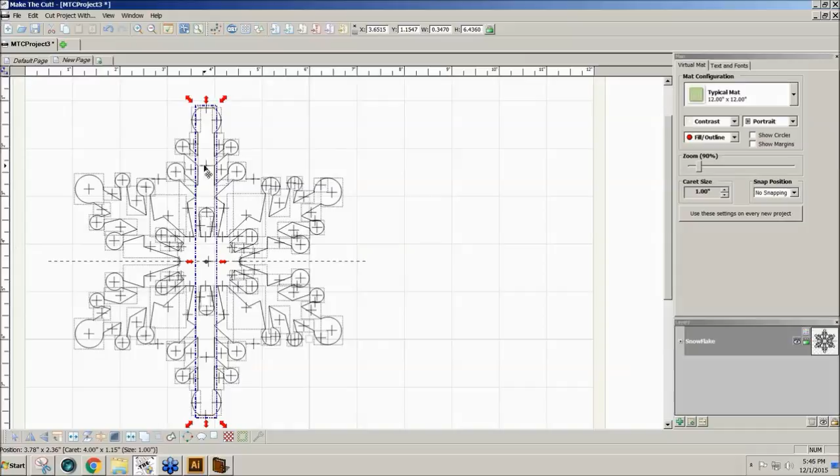But if I go through and find all the horizontal lines first, I'll just click on all of them and send them to their own layer and hide that layer. I'll look and see if I can see any other horizontal lines, because those would all be score lines. Here's another one and another one. I'm holding the Shift again, sending them to their own layer. I see a couple more. Sometimes they're hard to see with the plus signs, but I'm just going to send that up and hide it, because all I want left is the cutting pieces.

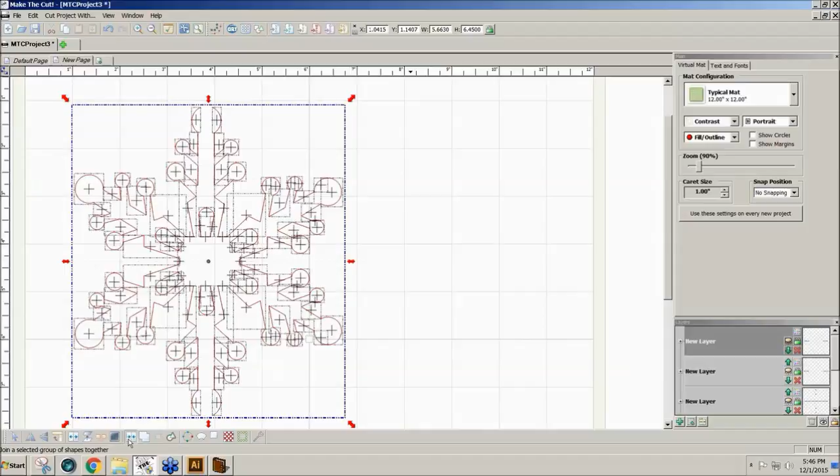So if I select them all and join them, I can see them a little bit better. So yeah, that looks pretty good. But as we saw before, they were all broken apart. So to join them back together, after I've joined them here, I can go to Fuse and Weld and apply, so that now all of these pieces are one single shape. And that's really what I need. They don't fill in all the way because there is an open path here at the top and an open path here in the bottom, but we know that all these lines are now joined, which is a good thing.

Now I'm going to send this to its own layer by clicking on the two green plus icons in the lower right corner, then right click and move it to the bottom. So now I'm going to hide that, and I'm going to open all of these score lines that were in the design. Now this is a small design, so it's pretty simple. When you have pop-up cards, every other level is going to be opposite. So this would be a valley fold. This is a mountain, so these are valleys.

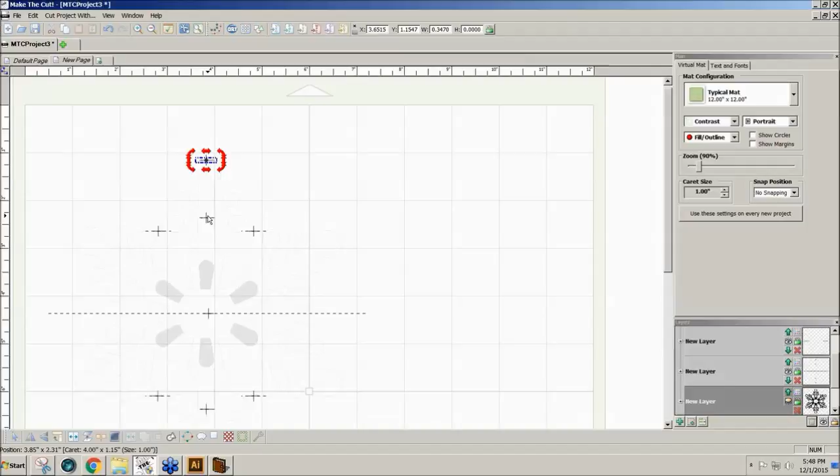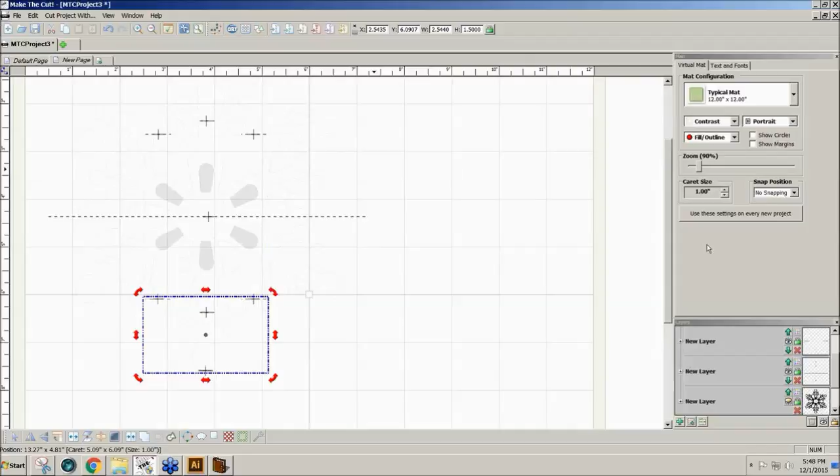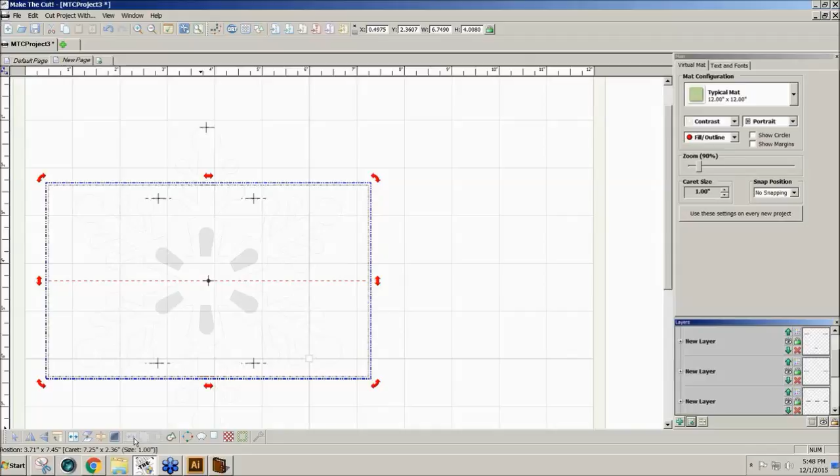I'm holding the Shift key and clicking on all the valley folds. This one's a mountain, so these two have to be valley. This is a mountain, and this has to be a valley. So it didn't keep them all. I'll send those up. I'm going to hold Shift and select. I'll just do the mountain ones, there's fewer. I'm going to hold Shift, left click on the mountain, and this mountain, and this mountain, and send those to their own layer. I'm going to join them so that they'll stay together, and then I'll hide that layer.

The rest of these will be valley folds, so I'll just select them all, join them, send them to their own layer, click the trash can to get rid of any empty layers, and then I'll open the snowflake layer, and now we have the three different pieces for our file. I'll left click on the name and type in cut, because these will be cut, and then this selection. If you click on the actual thumbnail, you'll see the selection. Let me click on this one.

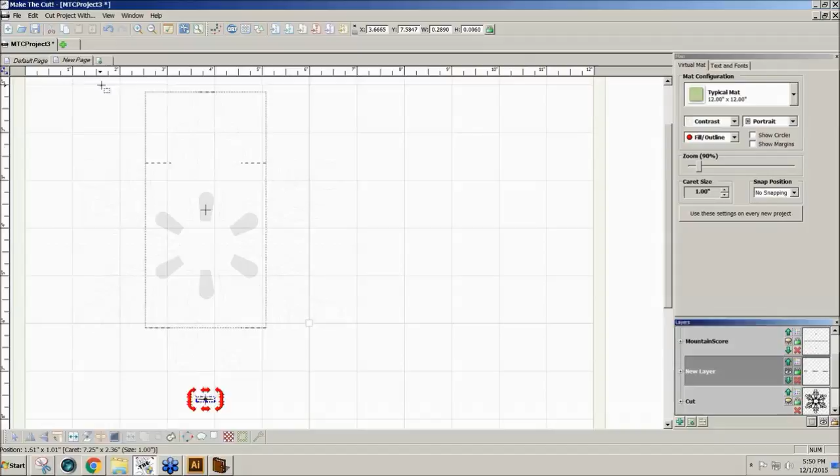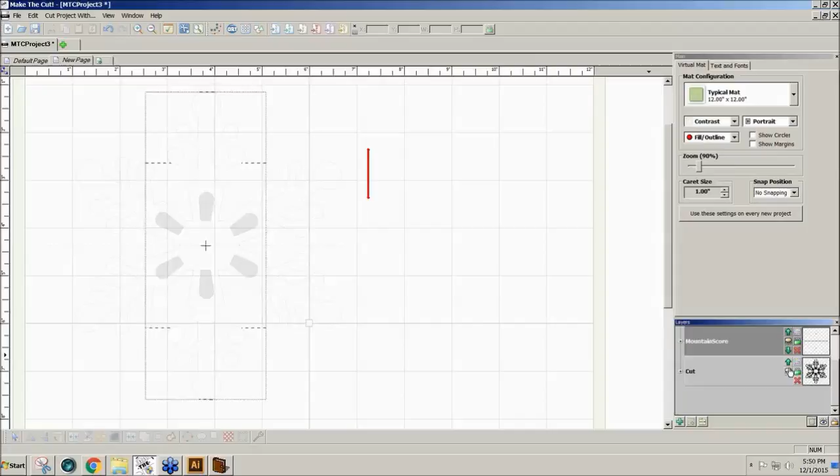I'll select these. These are going to be the mountain folds. Mountain score, and then this layer should be the valley. So I'm going to hide the mountains, hide the snowflake, and again select all of these. Oh, I see. These should be valley folds. So I'm going to join them, send them to the top, and we'll call these valley score lines. Get rid of the empty layers. And now I have 3 different layers.

Mountains, valley, and cut. So then I can send this to my Zing or any other machine.

I can export as SVG if I want, and everything is on their own layer. Now this is pretty simple because it is a small design, but if you had a big city to do and you had tons of score lines, it could get very complex and annoying.

The method that I posted back in 2012 to help you group things in Illustrator before exporting as SVG doesn't work with open path lines, meaning that these are not closed shapes, because in Illustrator if you select all the lines, which are called strokes, and all of the fills, and you import them in, you get double lines of everything, and that's not what we want.

So from Illustrator you either have to select the lines, which are called strokes, or you have to select fills to export as SVG. When I do that with fills, they come in their proper groups in Make the Cut. But with the strokes, they're coming in as all individual pieces, which gives us what we started with, lots of small pieces instead of joined pieces on their own layers.

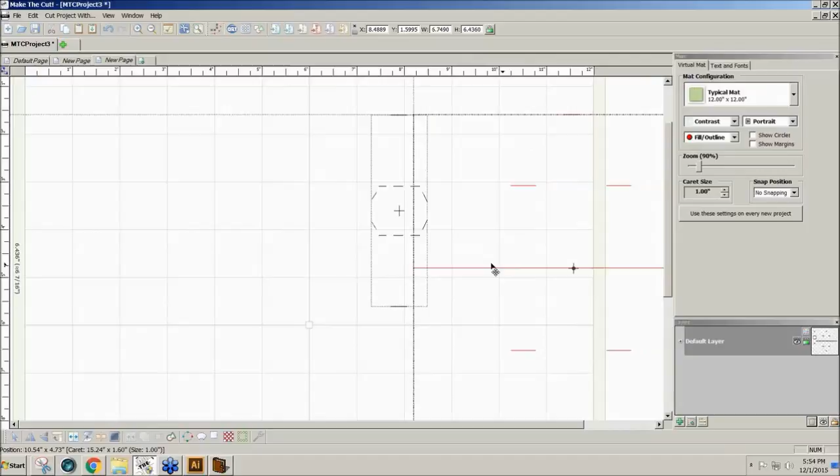Now I'll go back here and I'll select just the blue lines, and when I do that I can do Control-C copy and in Make the Cut, Control-Shift-V, and those lines come in. If I line them up directly over the center, I hope those would be in position, but I'm not quite sure. But let me undo that.

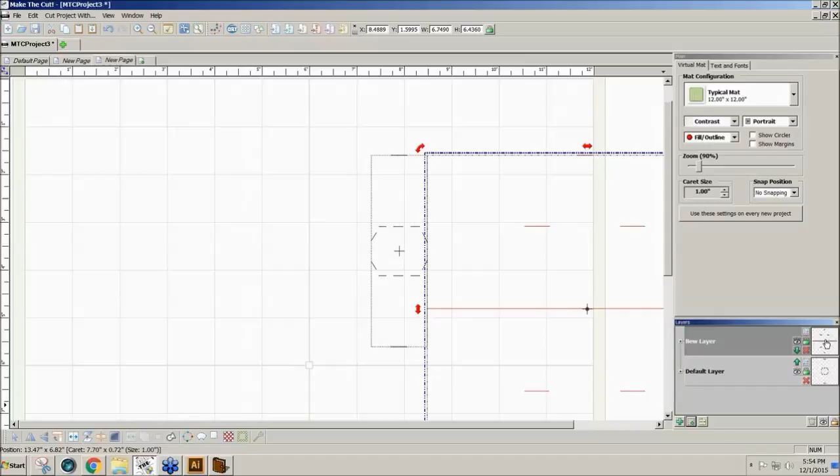Before I combine them, I'm going to send these to their own layer. So now I have the red lines here, and I have the blue lines here. I'm going to drag the plus in the middle right over the plus there. And then I'm going to go to Illustrator again. I'm going to click on the black lines.

And again, I have gone through this process. Right-clicked and selected Group. Right now they're grouped already. And then after they're grouped, Release to Layers, Sequence. That's how I got these all grouped and ready to go. If they were fill colors... there are no fill colors in this design, so I can't do it that way.

So I just go to Select, Same. This time I did stroke color. So whatever stroke color you have, they'll all be selected. And then I'm going to copy, Control-C. I'm not going to do stroke color, I don't think. No. I'm going to copy, Control-C.

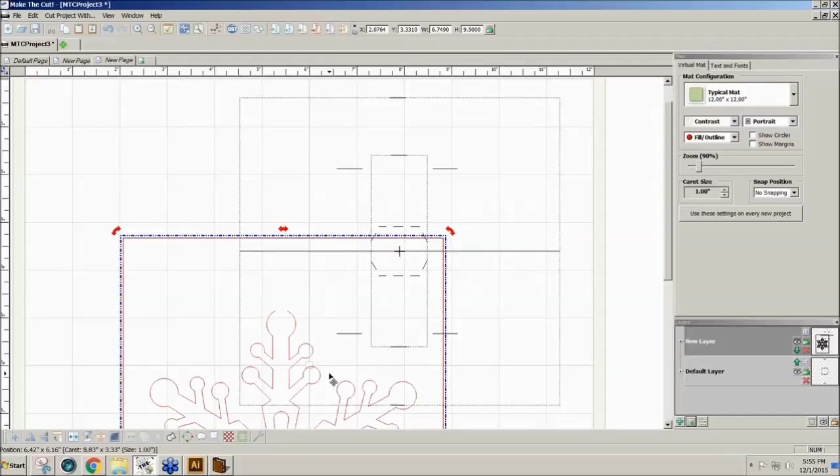Go into Make the Cut, Control-Shift-V to paste in place, and I'm going to move this into position right over the score line where it should be and send it to its own layer. And so now I have all the design pieces.

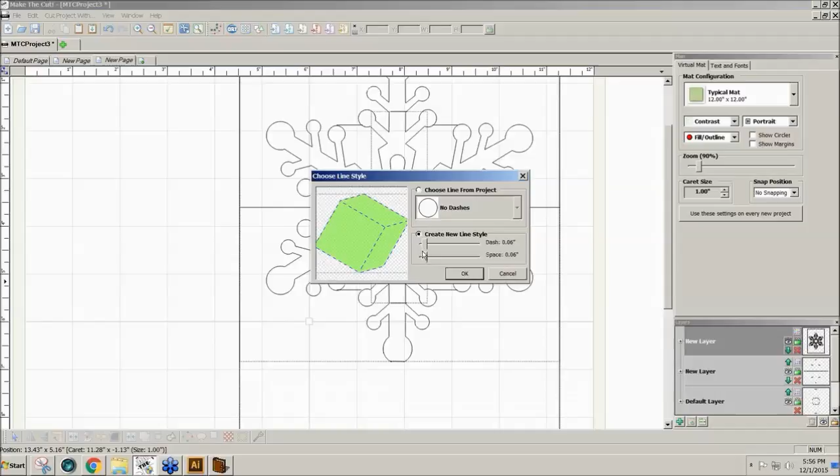If I want to make these score lines into dashes, I'll just click on Create New Line Style and set the spacing to where I want, and OK. And I'll do the same with these other score lines, Create New Line Style, and OK, so that now I have all the cut lines here, all the mountain folds and the valley folds. So you can click on the thumbnail to select the lines you want.

I'm going to select all and move this down a little bit. If we don't want the card and we want just a snowflake, as I assume was the original intention, you can left click with the node editing tool, which is the second arrow on the left, and delete these outside lines that we don't want, if you were trying to do just a snowflake and not the card. So I assume this is part of a smaller project, but this is the result.

It's a nice clean file, but having to work with these layers in Make the Cut is a little bit frustrating because of the problem with when you use 'to each its own,' you get all these different segments going to all different layers, and we want just 3 layers. So hopefully this answers your question.